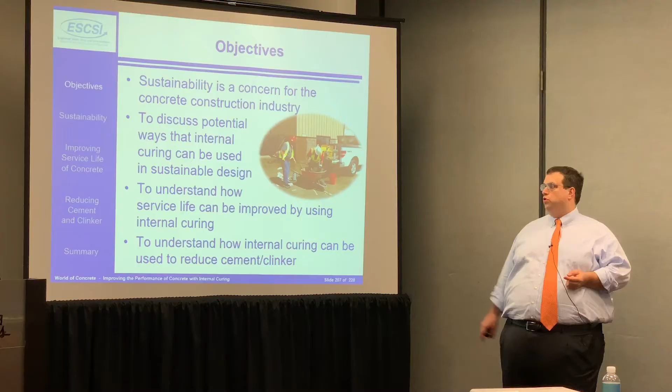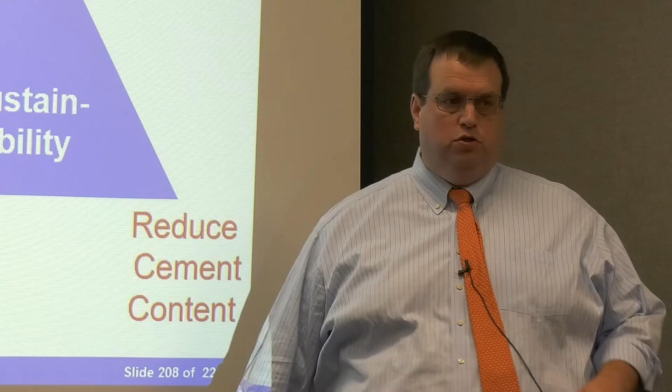Sustainability is becoming a much bigger question for the concrete industry, and I think we could understand a little bit about two ways that internal curing works. One, it can dramatically improve your service life. Two, it can substantially reduce the amount of cement or clinker in the system. So there's really a three-pronged approach: improved service life, reduced clinker, and reduced cement content that you can start to tackle here.

We talked a little bit about this idea that you could dramatically improve the service life by reducing cracking. Here we can see internal curing increases hydration, reduces porosity, and reduces the interfacial transition zone. By doing this, things move through the concrete more slowly, which means that race to get those chloride ions to the reinforcing bar is going to take a longer time in the internally cured concrete.

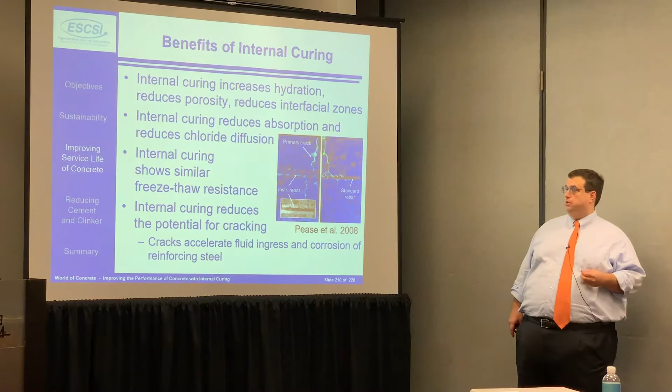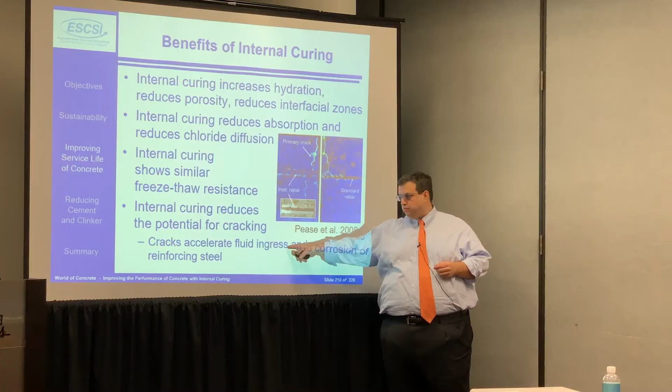Again, this is just showing you a picture. That crack that comes in not only hits the bar, but goes a substantial length along the bar, which can become very problematic. Cracks are going to accelerate that fluid ingress. Now, we've done, and I'll show you a plot later, an analysis with cracks. This is not an analysis that considers cracks -- this is just conventional concrete versus internally cured concrete.

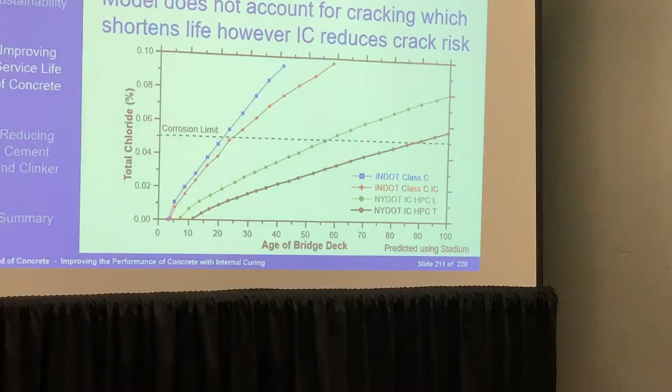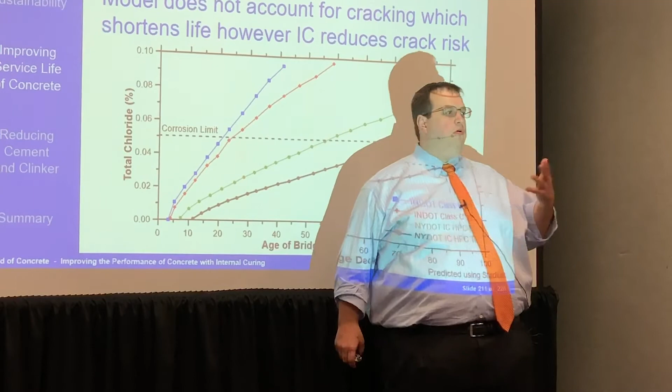When we were working with this with a particular DOT, they were very excited about their typical mixture. This is the service life of their mixture. Typically what you would say is the service life is when it hits this corrosion time plus about 6 years. So a typical bridge would last 23 to 24 years. The internal curing and the benefits of that are going to buy you about 4 or 5 years, plus the benefits you're going to get without the cracking in the system, which can be substantial.

If you take your internally cured system and make a slight modification -- here, this was moving to maybe adding silica fume into the system, a slightly more dense mixture -- you see your conventional concrete moved from about 20 years to about 50 years, but your internally cured concrete moved out to about an 80-year service life.

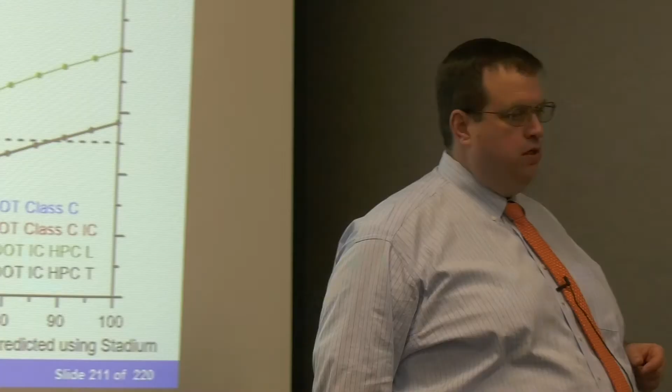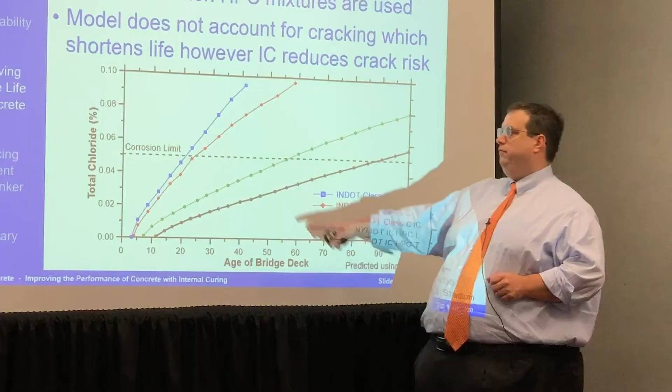So there was a question earlier about the actual costs of the concrete. On one of these projects that we were looking at, the difference in cost of the lightweight was about $3 a yard. The difference in cost by the time you were done with the high performance concrete was between $8 and $12 a yard. You've gone from a 24-year service life to an 80-year service life.

The overall cost on this project was roughly $4,000. So just to put that into perspective, you got triple the life out of the deck for about $4,000 on a $500,000 contract. Because all these other numbers we've been quoting are the cost of the concrete -- it's not the cost of the permitting, it's not the cost of the design, it's not the cost of the construction, it's not the cost of all the other stuff that goes into that. Huge difference in the service life.

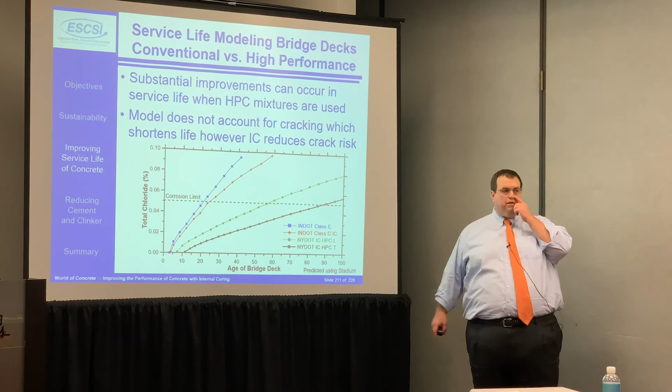So when we want to think about this from a sustainability perspective, we've used a third of the clinker, because we've only built one bridge, we haven't built 3. Substantial impact on the carbon footprint with a relatively small change in the overall mixture.

Now, I do want to point out, and I try to say this all the time, an agency that expects to get this at the same price -- that is a wrong expectation. This is a value-added product, producing a product of greater value. One would expect that with the additional attention to detail and the additional aggregate in the system, you'd expect to pay a little bit more, but the benefits far outweigh the price that you're putting into it.